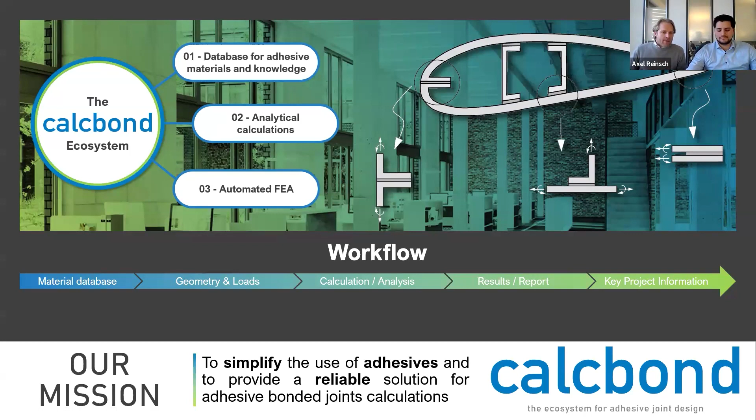That includes three major fields. One is the database for adhesive materials and the knowledge to work with that and with calculations on the platform in the wiki. The second field is the analytical calculation itself. We have one area, I'll show that in a minute, where you can undertake analytical calculations, type in your data and go. And the third field is why we are here today, and that's the automated FEA. So let's go online and see how it looks and try it out.

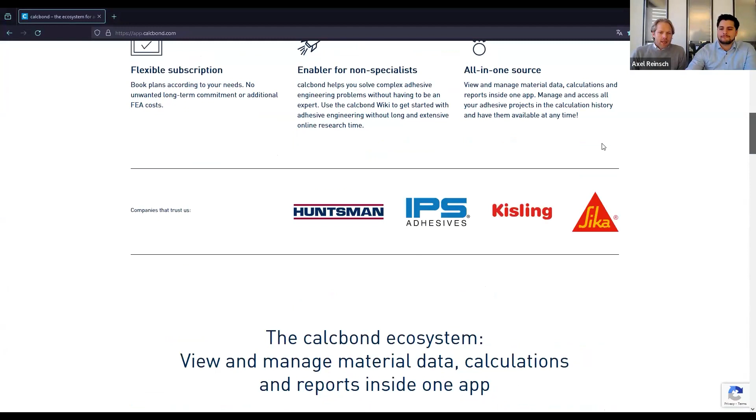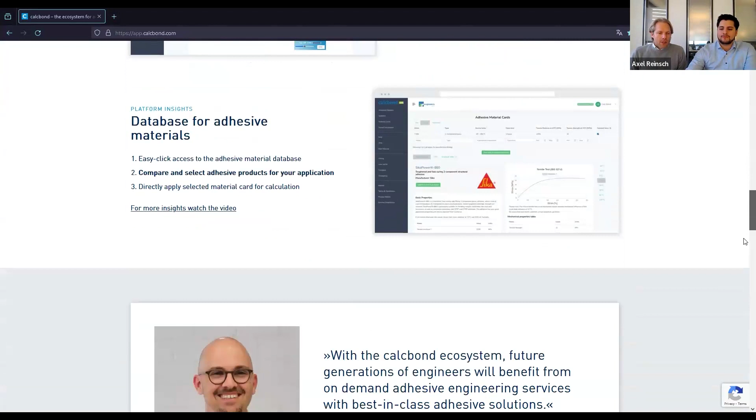All right, so when you go on www.calcbond.com, you will see this landing page. If you scroll down, you see a quick introduction about what you could expect once you have registered on the platform. Here are our cooperation partners, Huntsman, Sika, Kisling, and SciGrip. Further down, you can see some videos. We have a YouTube channel that you can explore. If you want to register, you can click on the 30 days free trial, and you will be led to a first field of information.

You enter your email address and you have to create a password. You have to confirm your email address from your email account, and then you get to a second input field to enter some more information about yourself, and then you'll be led straight on the platform. We can skip that because luckily we are already registered. So Fabian just quickly enters his information, and here you go.

We land on the index page of calcbond, and the platform is organized in a way that you have on the left-hand side your navigation bar with all the different fields and information areas that you can explore. And in the middle, you have the workspace where everything takes place.

So first of all, let's imagine you have just registered and you want to see where all that information went to. You can go to your user portal on the left-hand side, roughly in the middle. And here is your personal data stored, and you could edit and change everything that you have entered in case you want to. And later on, you could as well, because you started as a free user, as a trial user, and you don't have to pay anything here.

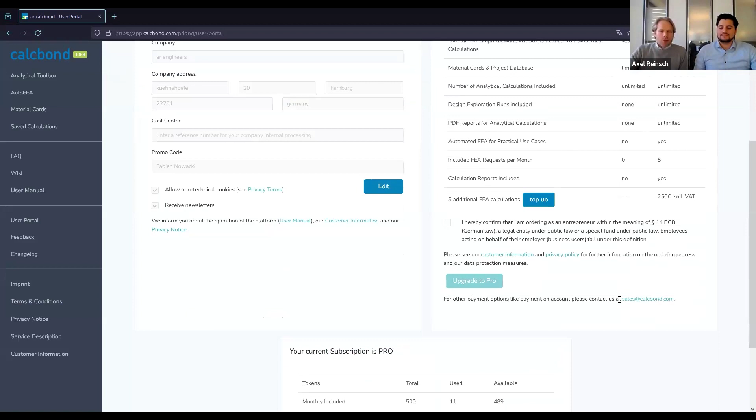And if you don't decide to buy, and that's very important for us to say, there's no trap. If you don't want to get anything on the platform, you will be downgraded after 30 days automatically to a free user, and nothing has to be paid, of course. Once you decide actively to top up or to go to a pro usership, you can do that actively here. You go to upgrade to pro, and then you will be led through the process, or simply send us an email. Of course, that's always possible.

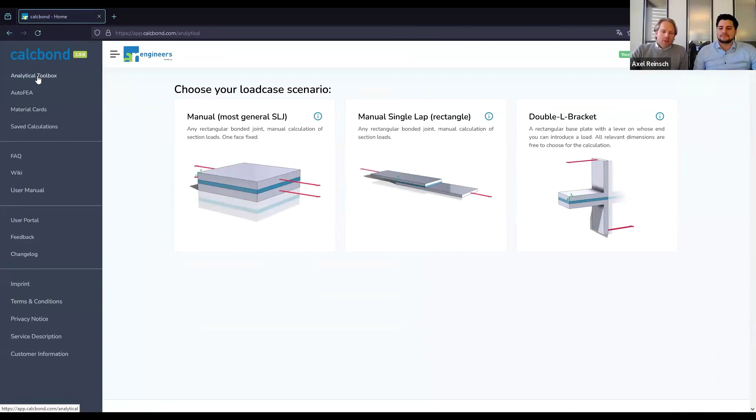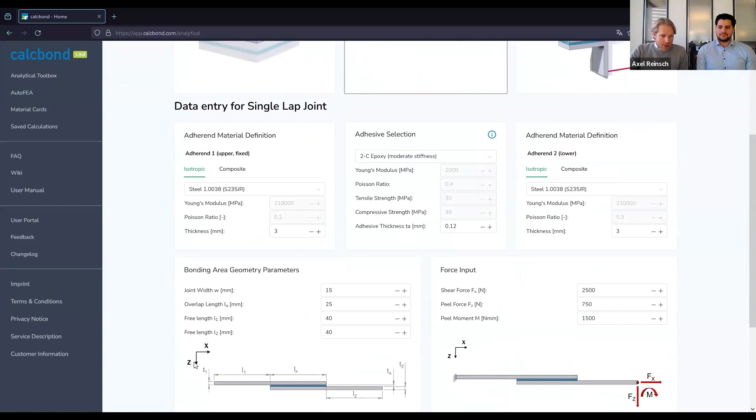Okay, so far from the user portal, and let's go top down with all the features on the platform. First of all, as I said, we have the analytical toolbox here. That's very straightforward. Analytical toolbox means a very simple approach to have a very clear and simple first calculation feature, and you enter your data, your material data, your geometry data, and you can click calculation, and within half a second you get all the information, a summary of what you've entered, and the output, of course, the results, and so on.

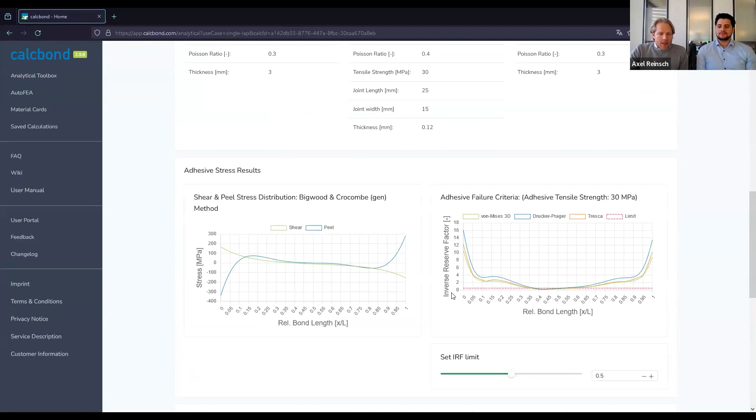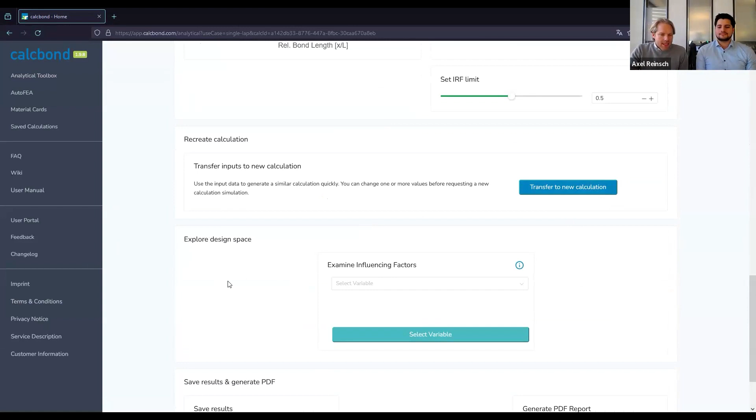If you want to change something, you can transfer to new calculation, do that again. You can explore your design space because maybe you want to play with the adhesive thickness, for example. You can do that with the design space explorer, or if you want to save that, you can do that here with saved results, and you can generate your report here on that button.

We will go into detail with all these functionalities on the analytical toolbox in one month's time, on the 29th of February with the second webinar, but we'll say that again at the end of this webinar. So that's the analytical toolbox.

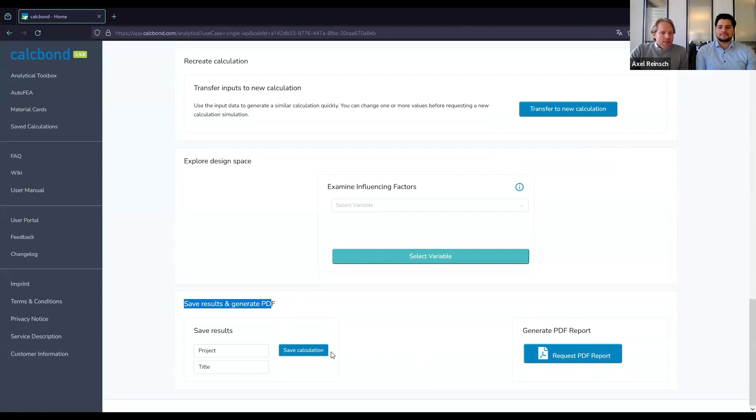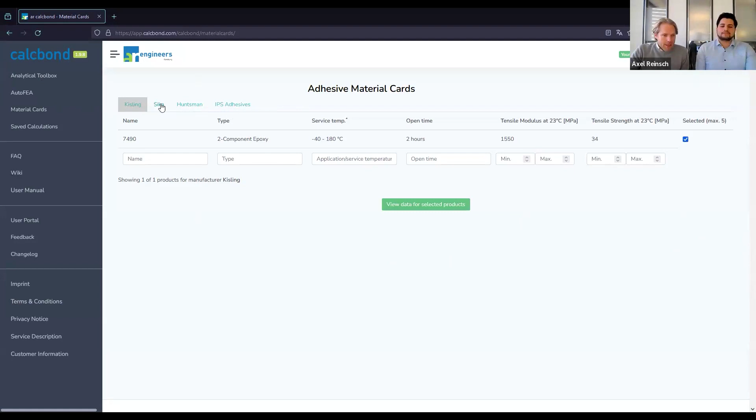Another very important feature for us is, of course, the material cards section, because here you see our cooperation partners who provide material input data, material information for their adhesives. So we have Kisling, Sika, Huntsman, and IPS adhesives on the platform. You can explore them, for example, ticking the box here, the first one from Kisling, you take the first one from Sika, just to give you an idea of how that would look.

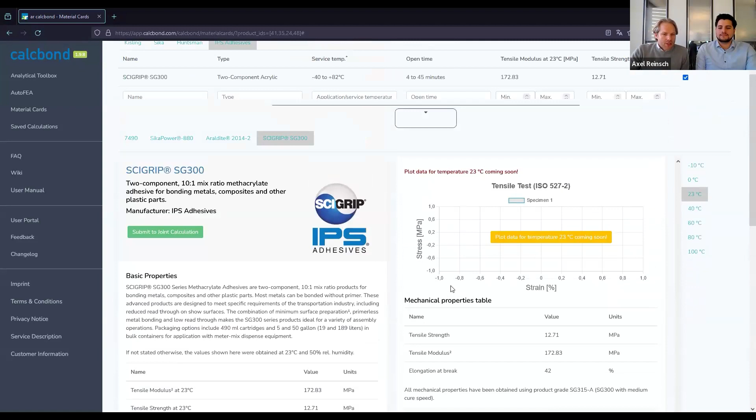You take one from Huntsman and one from IPS, and then say view data, and you will get an overview of those materials you have chosen on another level, and go and research all the information that has been selected. If you want to use something for a calculation, you can go straight to submit to joint calculation. You will be led back to the analytical toolbox with that material.

All right. The section AutoFEA and saved calculations will be explained by Fabian in detail. And yeah, I think that's it from my side so far. You find more information, of course, here in the legal area where you can read our terms and conditions and all that stuff. One thing I forgot, of course, very important, the wiki.

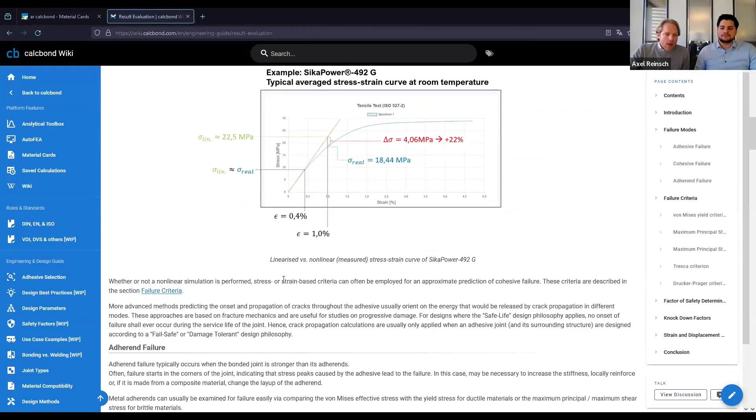As I said in the beginning, we provide knowledge not only for our platform, all the information on how to use it and make use of it, but as well general adhesive engineering information. So if you go on our wiki, you can explore that and go through all these very interesting topics. Let's pick one, for example, result evaluation. If I just scroll down, you see there's a lot of description about what you could expect from the platform, and as well what we do in the background and how you could work with that.

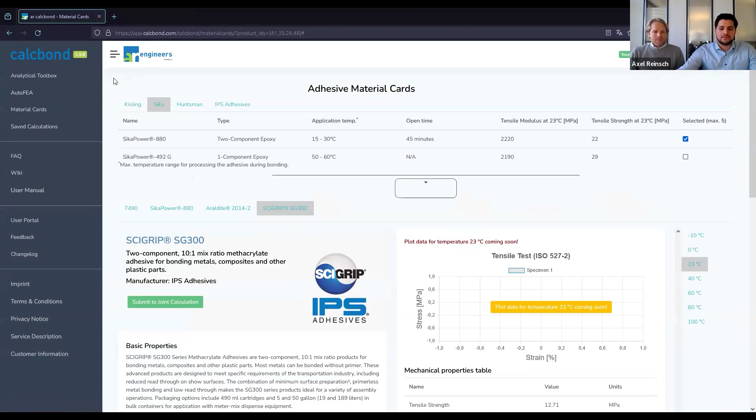And yeah, so now let's dive deeper into the main topic of this webinar today, the AutoFEA feature. The AutoFEA feature is a very powerful toolbox which enables you to perform in-depth 3D design analysis based on numerical simulation and suitable stress engineering methods for adhesive bonded joints, where we have implemented a set of predefined standardized adhesive bonding applications, which you can choose from to start off with your joint design analysis.

So here we have currently 5 different configurations inside the platform, starting with the bonded stud. So imagine a simply bonded fastener onto a planar panel of some type, or 2 profiles being bonded together, or coaxially bonded tubes also can be calculated here inside calcbond. And as well, we have a more complex glazing application here, so a window pane of some sort, a planar window, or also a curved window, which is bonded into a frame, can be parametrically designed and analyzed here. And of course, also the standard single lap joint, which many of you might know from typical lap shear testing applications. This can be calculated inside calcbond, of course, as well.

Yeah, so for today, let me showcase you the methodology of AutoFEA with the bonded stud. So if I click on the tile here, I'll be directly directed to the input geometry input parameter section, which is divided into the description of the shape and size, basically, of the bonded stud. So here we have a stud which is, for example, welded onto a circular base plate, which is then together bonded by an adhesive layer onto a base panel, which could be a side wall, for example, in a cabinet, or a vehicle, or a ship, or something similar. Also a roof or overhead bonded panel could also be replicated by this.

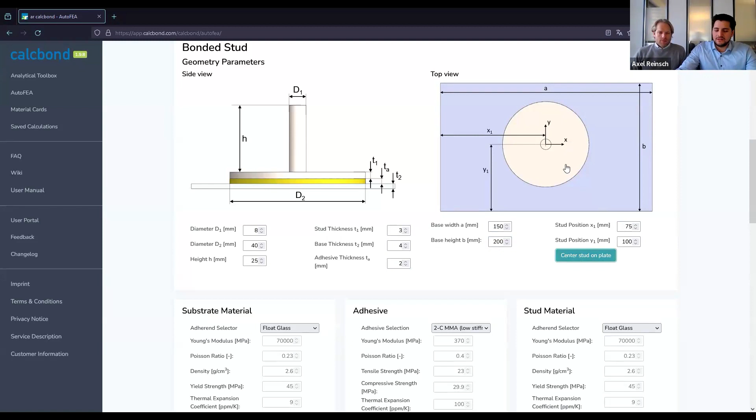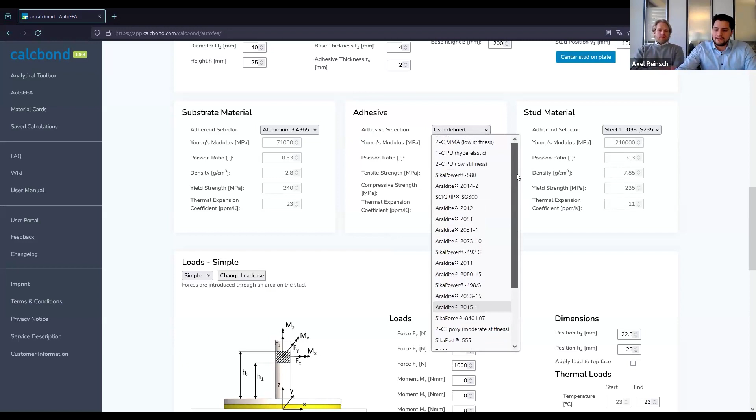Next, we have to define our material parameters, of course. So we have 3 components here, with the first one being the substrate material, so the base panel in this case. Let's say we have an aluminum, typical aerospace alloy, and the stud itself, the fastener, may be a standard steel alloy, which we want to bond, for example, with a SikaPower-880, which is a higher stiffness epoxy-based adhesive, which is suitable to bond these materials also. And then you can see here the basic mechanical properties that are taken from the calcbond material database and used in the calculation here. If you want to calculate your own specific material, you could also go to the dropdown and select user-defined to type in your own adhesive mechanical properties. But for this demo, let's stick with this product here and move down further to the load section.

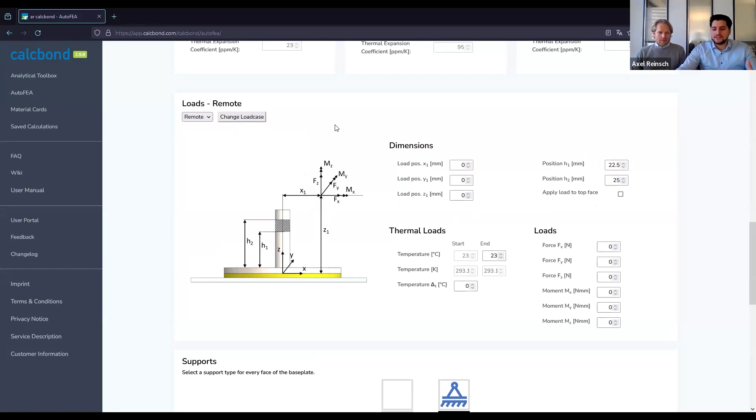So every bonded joint, if you want to calculate how it behaves under pressure or stress or any other type of loading, you need to define loads and boundary conditions. So here we have two different examples. We have a simple loading situation where you directly apply a force or a moment or a combination of all of those at the bonded stud, in this case along the shaft here. Or you could apply a remote loading if you want to account for distances, for lever effects. For example, if you bond devices with an offset center of gravity, maybe you could do that. But for now, let's stick with the simple loading. And let's say we want to apply a horizontal force pulling on the stud with 250 newtons. We don't want any vertical load here.

And we want to say the force is acting right on the top edge here of the component. And also we can apply a differential temperature. So if we want to see how would my joint perform not only under a mechanical load, but also a thermal load, I can increase the end temperature, so the operational temperature basically. And let's say we want to see how the joint performs at 65 degrees Celsius.

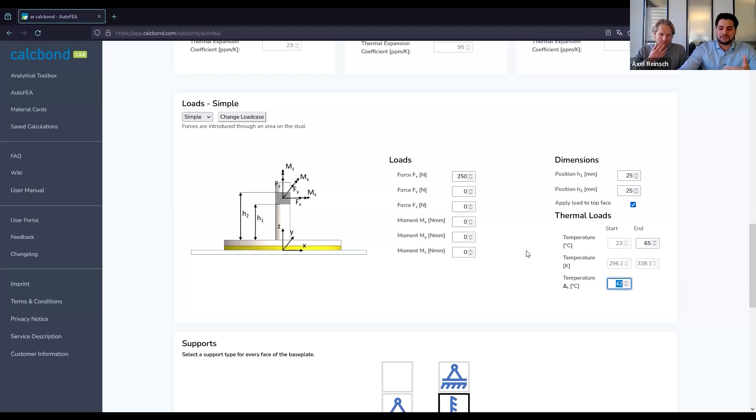I can do that, and then this will be implemented in addition to the mechanical force as a boundary condition where the thermal expansion effects of all the materials will be taken into account, and also the degradation of the properties of the adhesive material due to higher temperatures, or also maybe the improvement due to lower temperatures for some types of adhesives. Moving on, we have the supports.

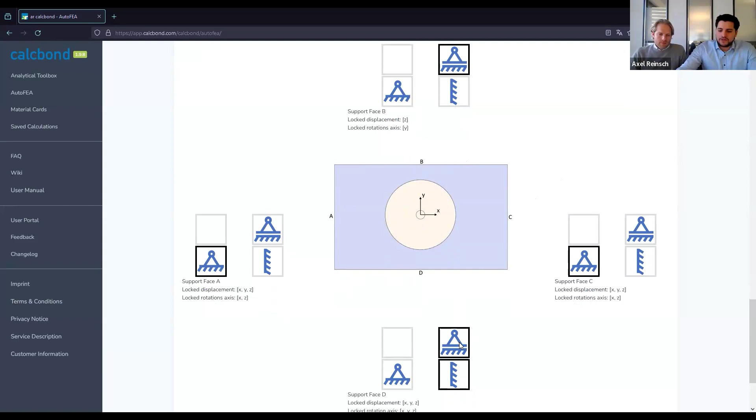So once we have fixed the input data for the forces and the geometry and the material, we need to define some type of supports which hold my components in place, basically. So here we can define different support types on every edge of this base panel here. So let's say we want to fix the left and the right edge with the simple support, so only the lateral and vertical movement is fixed, but rotations may be free. And let's say the upper and the lower edge in this case, only the vertical movement will be fixed, but everything else will be kept free.

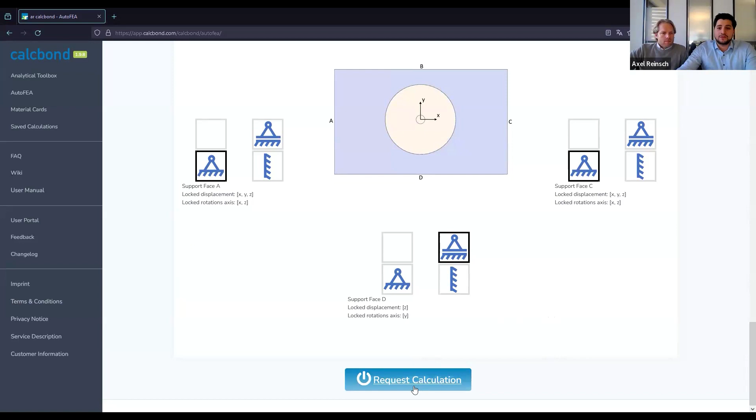So once we have defined this, and also don't worry, calcbond automatically checks if your boundary conditions are suitable. So if you would still have rigid body movement, for example, the system will notify you so you don't run into the risk of sending off a calculation request for something that couldn't be calculated. Okay, then you're done, and you simply submit your calculation request by clicking on the big blue button here. And then your submission will be processed, and on the bottom you get an information box which keeps you up to date about the progress.

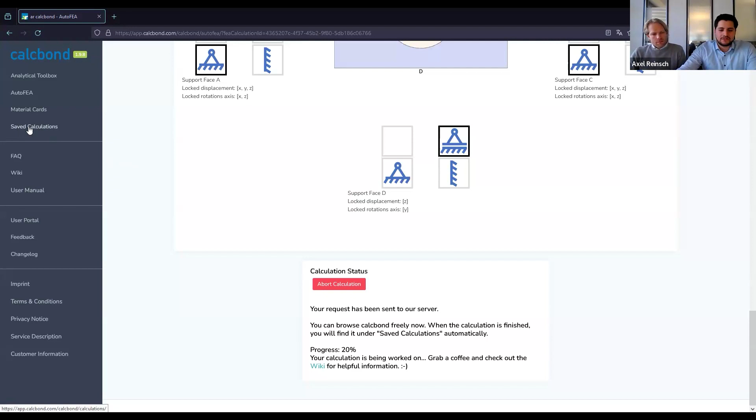So now the request has been sent to the server and will be worked on back at the AR engineer server in Hamburg. And when the results are finished, you can see them online in the platform. So you can either leave this window open and wait, or roam around freely on the platform in the meantime, and then just go back to your saved calculations area here on the left, where you get an overview table for your analytical calculations that you've done in calcbond, but also, if you click on the second tab, your numerical calculations, so the AutoFEA calculations. And right down at the bottom, I'll see, okay, my most recent calculation is still in progress. And once it's finished, I can have a look at it.

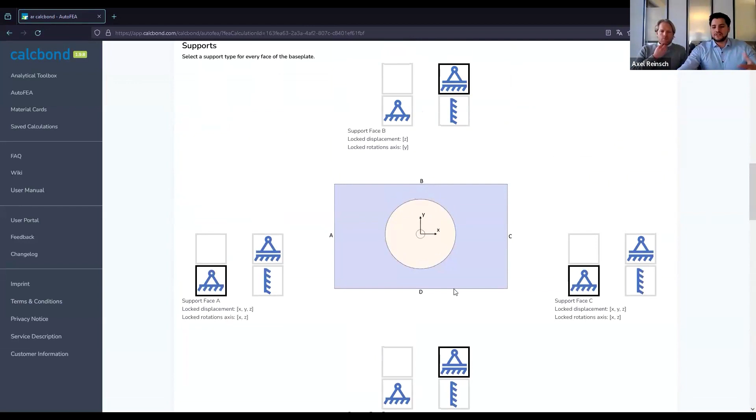For example, in the demo I did before, I just click on the link here of the project name, and it opens up my calculation. And when I scroll down, as you can see here, I have the result overview just as an additional section below my input parameter section, which shows all the statistics of the calculation model. So if you're a little bit more familiar with numerical calculations and finite element analysis, you can check the parameters of the model here. You can also check the most important result values here on the right-hand side. And of course, the visualization of the 3D analysis results for the entire assembly.

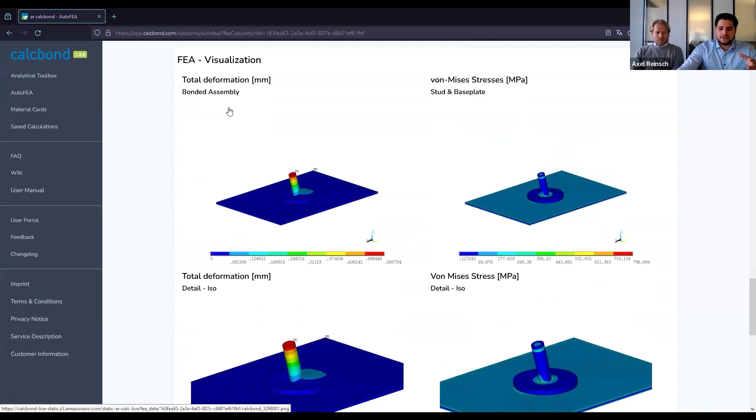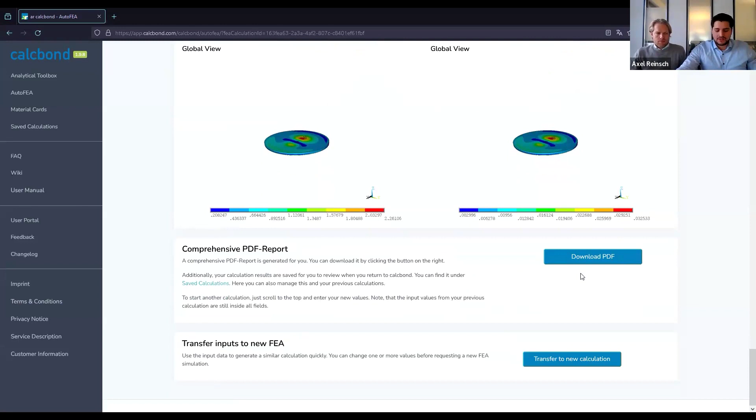So the deformation, the stress distribution on the right, also a little bit more zoomed in, and also isolated stress and strain results for your specific adhesive layer. So in this case, the example before was a bending problem. So you can see there's lots of bending going on in the adhesive layer here in the middle, and that is well represented within the stresses. Okay, and if I want to view the results in a summarized document, I can do so by clicking the Download PDF button.

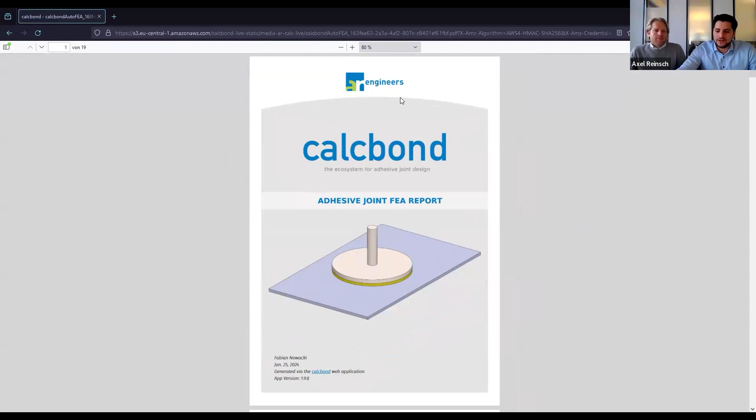And then my PDF report with the specific calculation will be generated and will be ready to view and also to save offline, for example. So here I have a cover page with the most important information about the user and when the calculation was done. I have an interactive table of contents, so I can jump in between the chapters.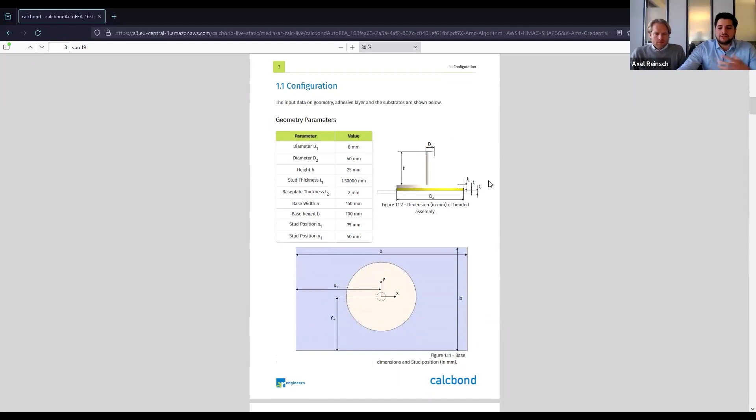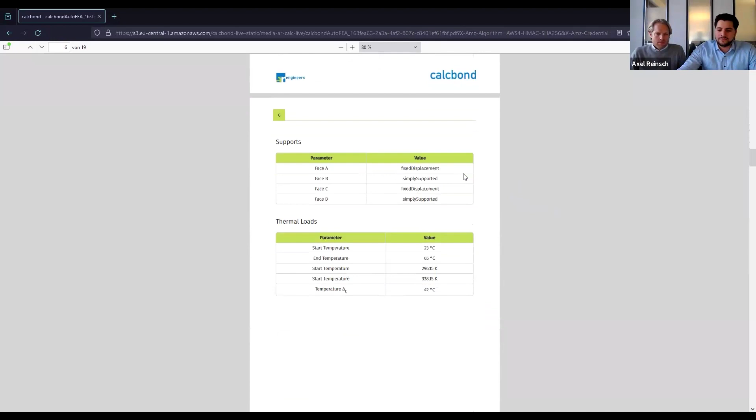And it summarizes everything from the setup of the simulation with your input parameters through the material data, the forces and boundary conditions of your components, and then a little more in-depth and specific engineering properties for the adhesive, because of course that's what we focus on in calcbond, the adhesive material and the mechanical properties used for this calculation. And if you choose a manufacturer-specific product, you also get a QR code with a direct product link to the website of the provider to get to know more about this specific product.

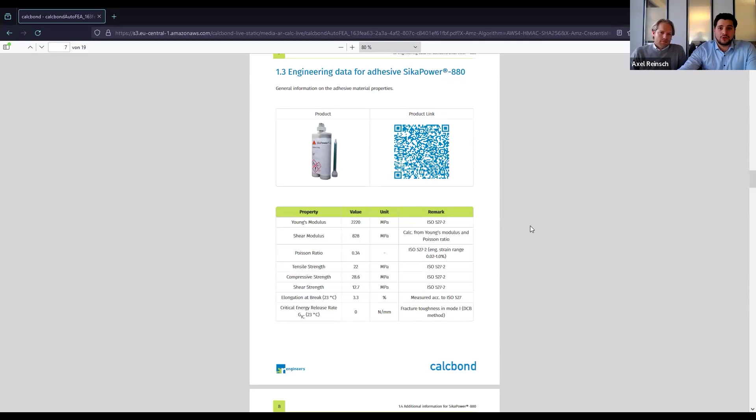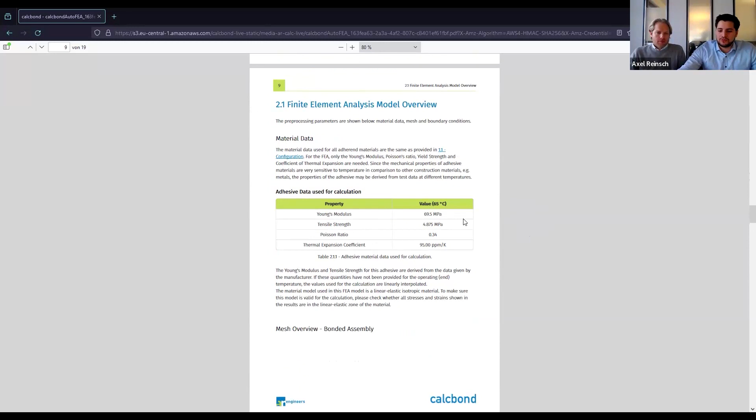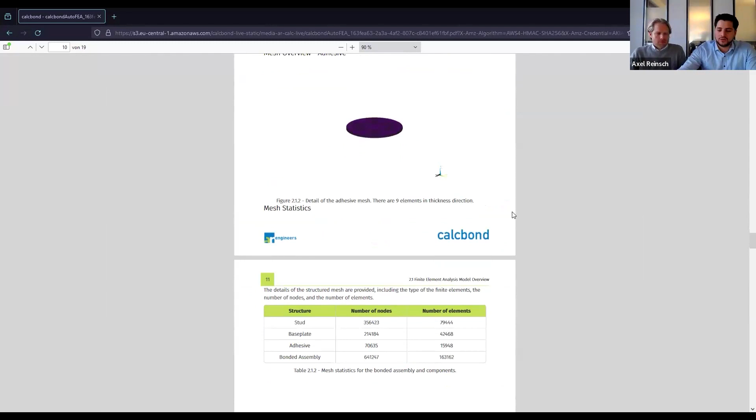And then in the AutoFEA report, you get more information on the analysis model with the properties being used for the analysis of the adhesive, the analysis model itself, so the finite element mesh. If you zoom in a little closer, for those who are familiar with FEA, they can check on the model quality, the mesh quality if they want to, and some more statistical values, number of nodes, number of elements.

And then finally, of course, the results. So here a little more extensive than on the online interface, the table with the maximum deformation values, stress values, strain values, and the plots, of course, that you've seen before.

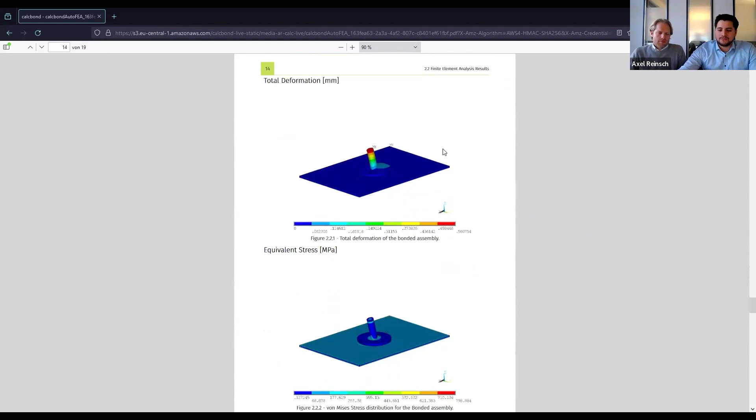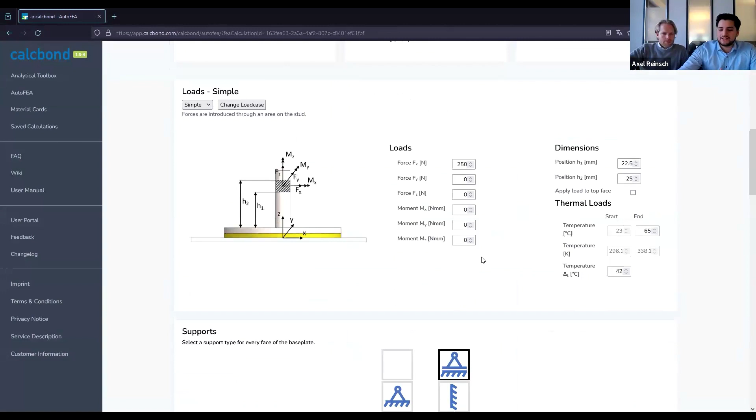Even if you share this document with colleagues, supervisors, or clients, you can directly click this link to get back to the calculation inside calcbond, even if it's from somebody else, as long as you are a calcbond registered user, or just scan the QR code with your phone or with your tablet here. So I'll click on this link here. And now I am back inside calcbond and can view this calculation live. Okay, so that is how you work with the AutoFEA module.

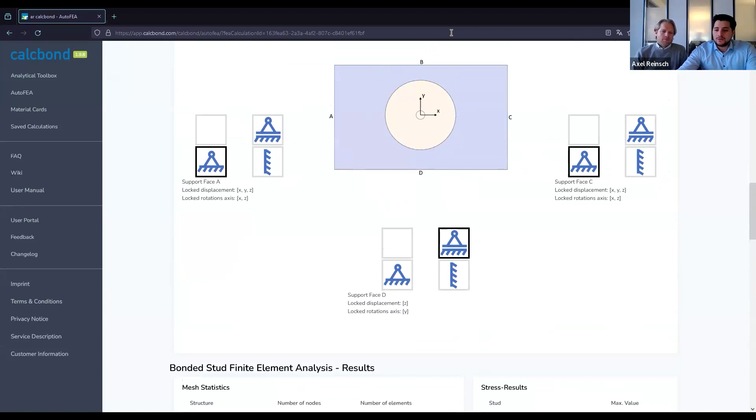I'll now switch back to the slides. Just a second. And there we are.

So of course, we've been working intensively in the past weeks and months, and also are still working intensively on some future updates for the platform, with the first one, very exciting one, being the user-defined material cards. So we want to provide not only specific material data for products on the market and given by the manufacturers, but also we want to enable you as a user to set up and save your own material data inside calcbond.

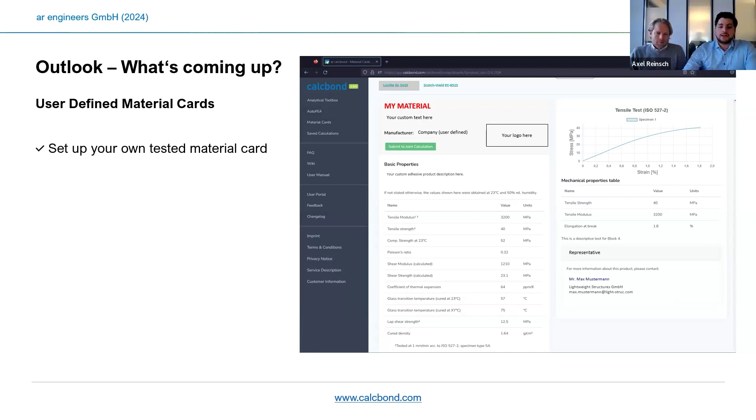So for example, if you have test values for products that are still not provided by calcbond by default, you can upload them and save them and also share them there. So you will stay in full control of who sees the data, and nothing sensitive will be in the wrong hands, basically. So that is very exciting and coming up soon.

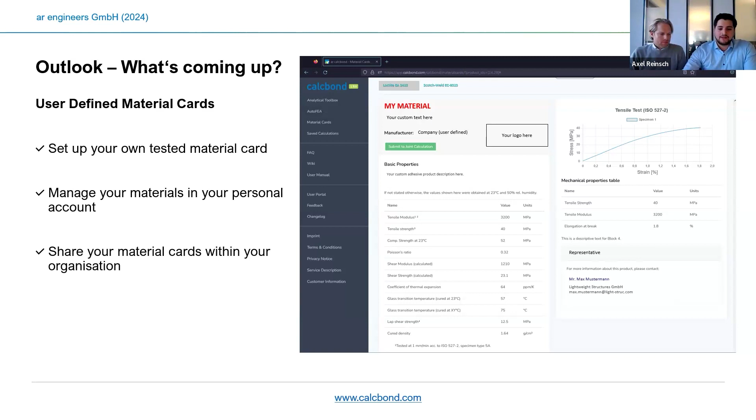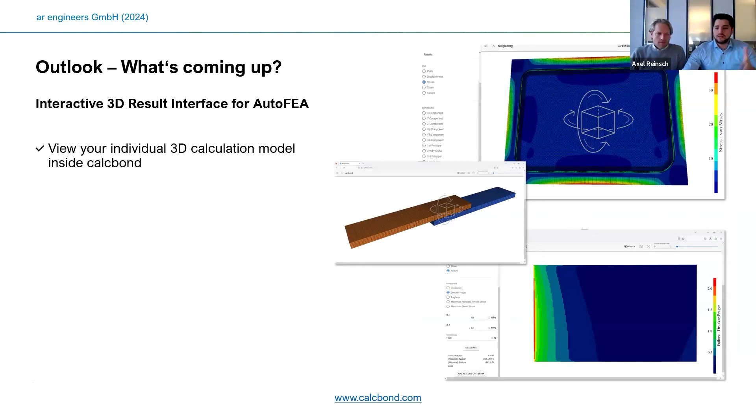Then we have an interactive 3D result interface planned and in the final works, where we'll be able to see your specific calculation model inside calcbond more responsively. So you can view the model inside the platform. You can move it, rotate it, zoom into it. You can hide and display different components of the joint. So for example, if you would hide the adherends, you can take a closer look and zoom into the adhesive layer.

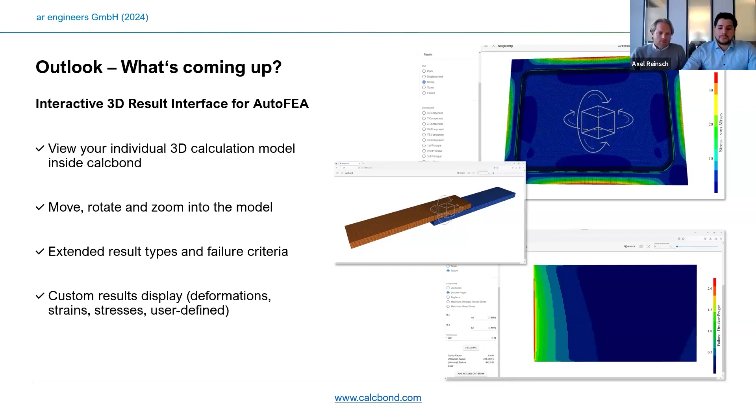You can access an extensive range of result types and specific failure criteria depending on the type of adhesive that you are working with. And you can define custom results and display them the way you like, and also integrate them into your PDF report just the way you need them.

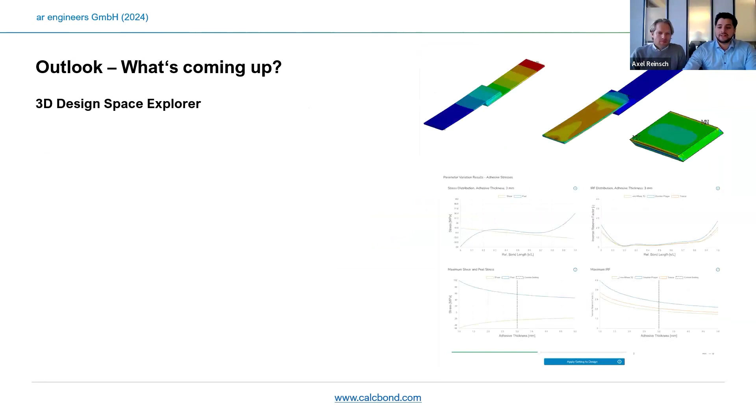And finally, we also want to improve the Design Space Explorer by implementing new methods that enable you to quickly perform design studies beyond classical finite element analysis based on machine learning techniques that boost the entire design study process. That'll allow for responsive real-time calculations as you change your parameters, basically.

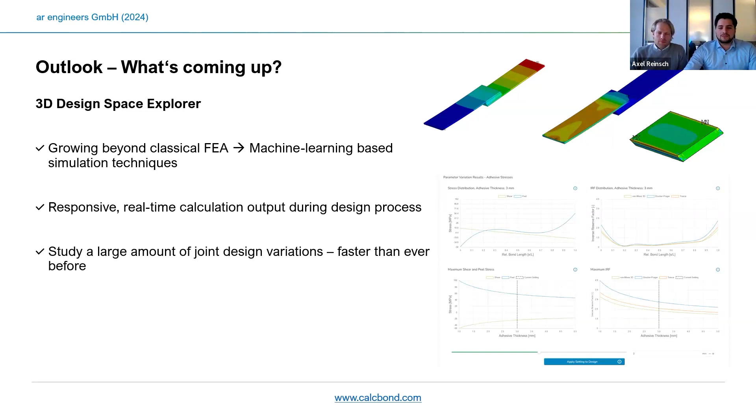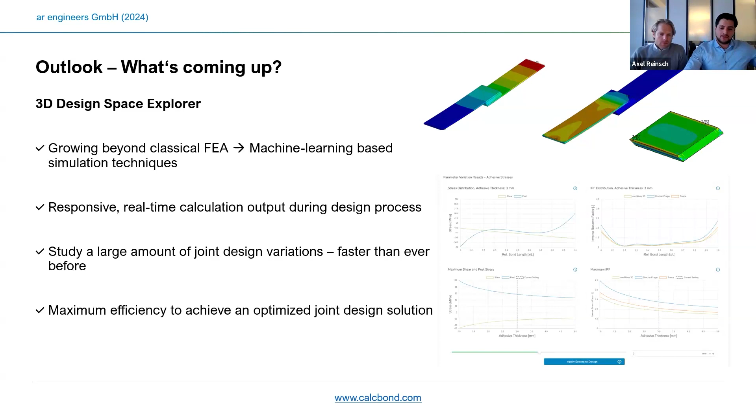You can study a large amount of variations of your joints within a matter of fractions of your typical study time, basically. And this enables maximum efficiency, of course, for you. So you will be on the way to an optimum joint design within a matter of seconds or minutes compared to your older design methodologies, basically.

Okay, so that's it from me, and I'll go back to Axel now to sum it up. Thank you, Fabian, for that great presentation of the platform live. Actually, you have seen how straightforward it is on calcbond to get your calculation on the way and get even your report done that you can send around as well.

We have seen the wiki where you can actually explore the platform, but as well study adhesive engineering, and that's amazing.

If you want to register for our platform, that's very simple. As we said in the beginning, go to calcbond.com and enter your stuff, and you're on. If after a while, after the 30 days free trial, you want to become a pro user because you want to use the AutoFEA that we have shown today, you will have to be a pro user, and I've shown that in my presentation. You go on the portal and enter your credentials, and that's it. You're good to go. And it's on a monthly basis. You pay 250 euros a month, and that's it.

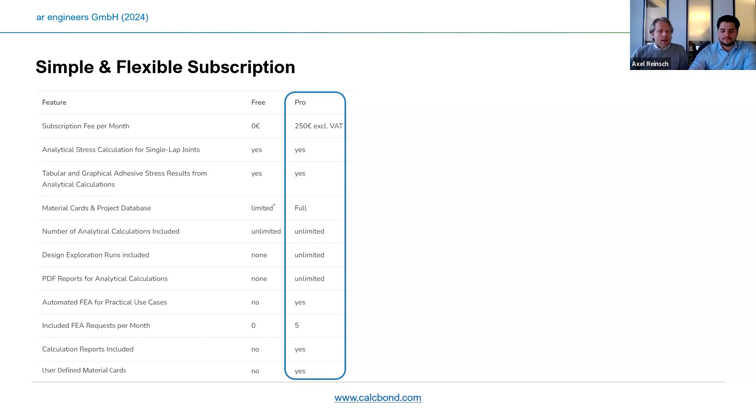And if after 20 days you think, okay, I've done everything, that's enough from my side, I don't need it the next month, you can cancel the subscription and it will expire towards the end of that monthly period. And then 3 or 4 months later, you think, okay, I need it again, and you go on and book the next month, or you send us an email and say, look, I need it for the entire 12 months, and then we of course can deal with that offline via email.

So we offer 30 days free trial to really try it out, and as you've seen in the beginning, there's no payment credentials needed to get a free trial. And if you don't do anything, this will expire and you will stay a free user. And as you can see here on the feature list, you still have access to the analytical calculation that we will present in the next webinar. And you have access to the material cards, and you have access to parts of the wiki. And if that's not enough, you can always sign up for more.